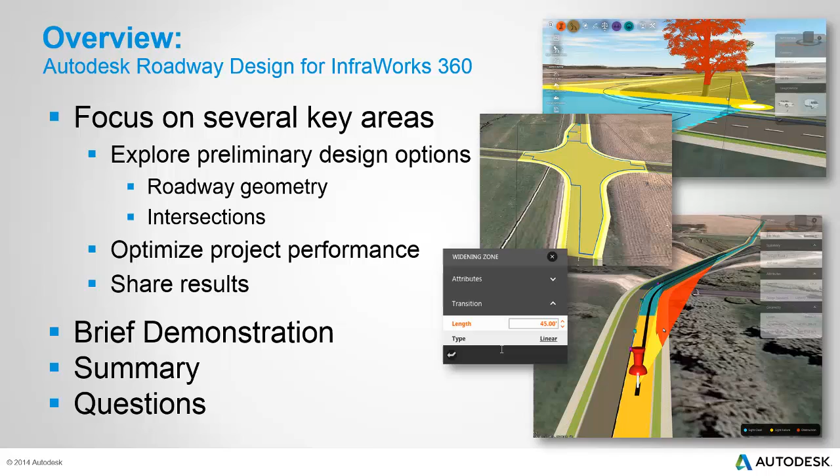Finally, we will explore how we can share our results with others. This will include internal folks like the design team and sub-consultants, as well as external folks like the project owner, recommending body, and the general public. Now, the way we will focus on these key areas will be through a brief demonstration followed by a summary. We will also leave some time at the end for Q&A.

My goals for today's session are easy. First, I want to give you some exposure to the roadway design for InfraWorks 360 solution, as well as a review of a subset of its capabilities. I say subset because it would take much longer than our meeting today to review all of its functionality. Instead, we will concentrate on the primary features and their related business benefit. In other words, how specifically does roadway design for InfraWorks 360 improve the preliminary road design process? So with that, let's go ahead and get started.

We begin our demonstration with the following scenario. Our objective is to explore some alternatives where we can connect the community on the west with the community on the east. The catalyst behind the project is to reduce overall traffic congestion. Currently, there are minimal river crossings available. As a result, during peak traffic hours, the existing bridges on the north and the south cannot accommodate the required traffic flow. In preparing these alternatives, ideally we would like to find a route where we can connect this main road here on the west side to this main road here on the east side.

Knowing this, as my initial proposal, I'm going to explore connecting from the end of this existing dead-end street along the existing roadway here and then into the open space. Now, to reach the open space, I will need to cross another main road at this point. From here, I will run my new road along the natural break in the property over to the riverbank. We will then cross the river and meet up with the existing road on the other side.

Now let's pause for a minute and think about how long would this process take you today. Essentially, coming up with a concept, determining if it's feasible, as well as creating a deliverable to explain the design intent of your proposal. And as you think about that, let me show you how we can accomplish this objective using roadway design for InfraWorks 360 Pro.

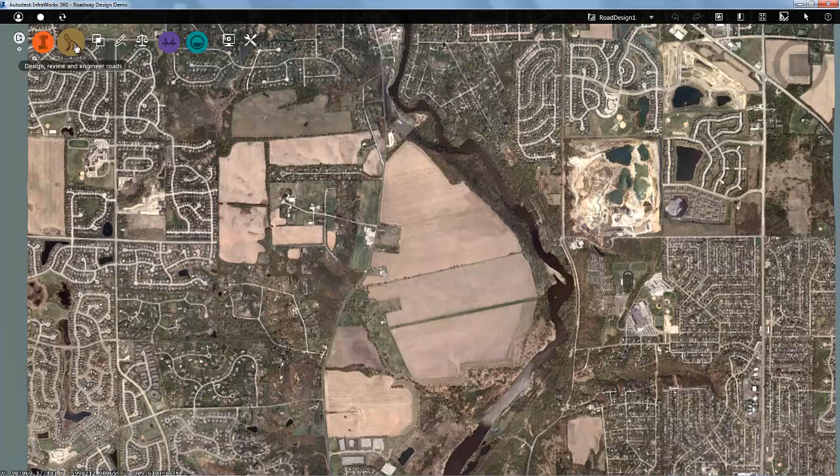Our next step will be to begin our preliminary road layout. This is a very straightforward and easy process. We simply click on the persona-based roadway tools, choose our desired road type, and select the style.

From there, we click the points to define our roadway. Notice as we do this, we have the option to enter a design speed. This design speed will determine the appropriate rules-based information during our layout. For example, notice as we change direction, a horizontal curve is automatically added. This curve is consistent with a 30-mile-an-hour design speed.

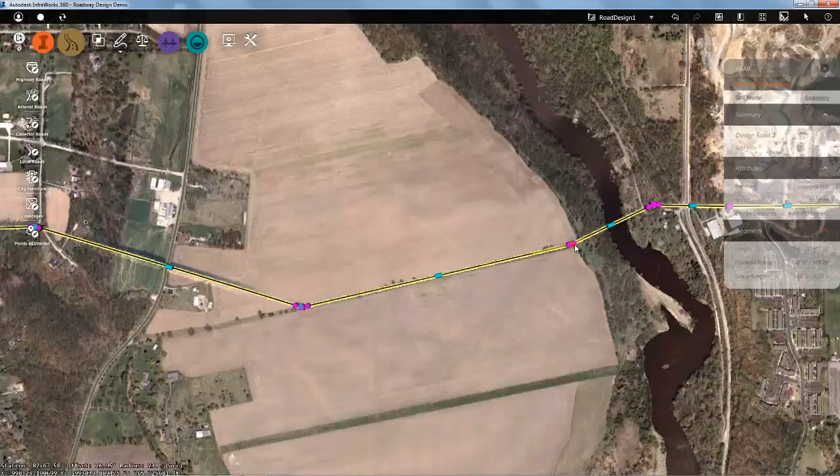We will go ahead and continue to pick points until we've crossed the river and tied back into the existing road on the east. Once finished, Roadway Design for InfraWorks 360 generates a completely modeled 3D roadway. Let's get a little closer and take a look.

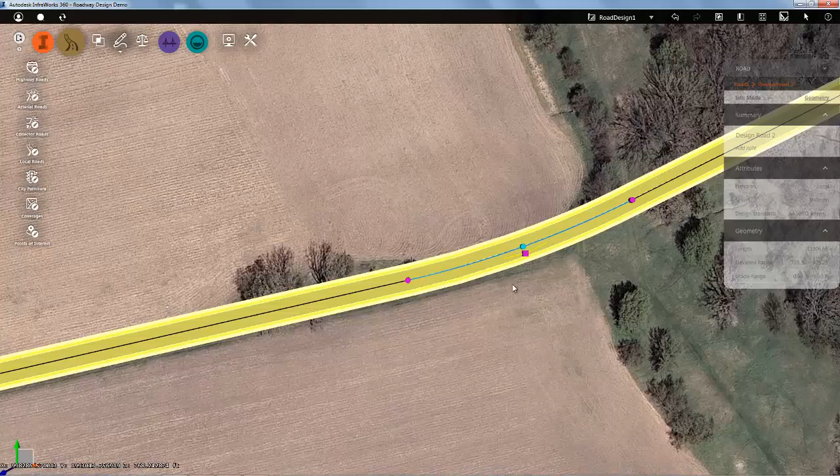As we zoom in, we can see intelligent grips have been added to key points within our geometry. Clicking on these grips allows us to dynamically update our design in real time. For example, we can update the horizontal curve radius, move the PI location, or both. After any change, the model is automatically updated, providing us immediate feedback.

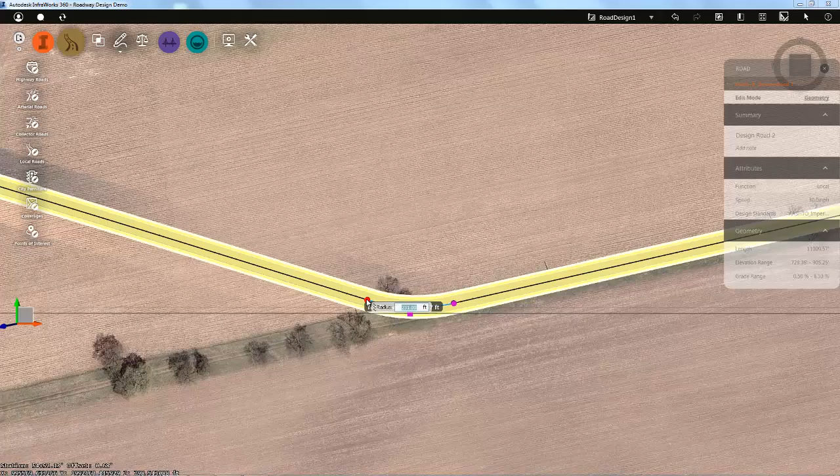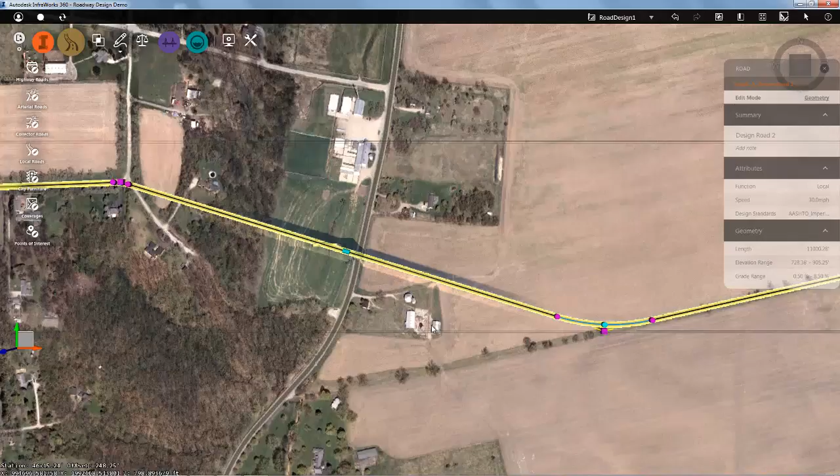Using this functionality, we can easily make adjustments to any portion of our original layout. For example, setting the size of this horizontal curve to 1,000 feet. As we move further to the west, several things become obvious. First, not only did our rules-based tools assist us with the horizontal layout, but also with the vertical.

We can see that the change in grade from one PVI to the other created an overpass situation with the existing road. This happened automatically because before we got started, I created a quick roadway to represent the existing road in this area, so we could see the intelligence that exists when two modeled roads cross. If the elevation is such that one is higher than the other, an overpass is automatically created. If their elevations are instead similar, an at-grade crossing is automatically generated.

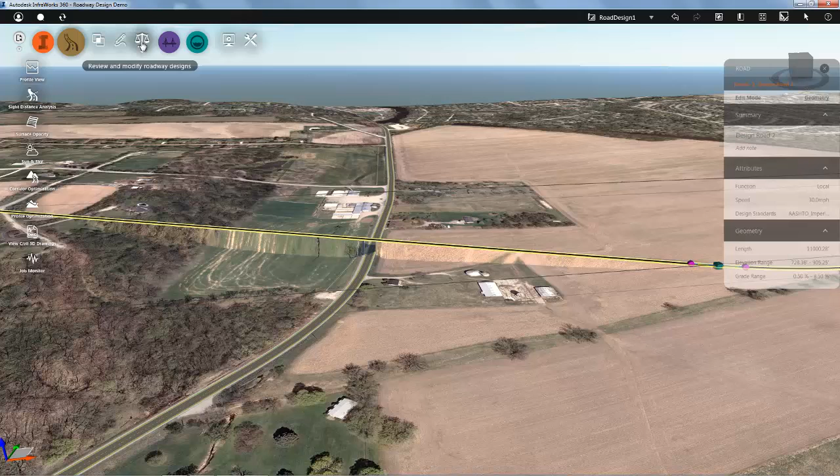Because an overpass is unnecessary in our design, let's adjust the vertical to create an at-grade crossing. We can quickly do this by displaying the profile view for our roadway and making our changes. As we review the profile, we can see the effects of the rules-based tools that were used as we picked the points for our roadway. In other words, PVIs, slopes, and vertical curves were all created consistent with a 30-mile-an-hour roadway design.

The total length of this road is just over 2 miles, and you may be wondering if Roadway Design for InfraWorks 360 can optimize the overall layout for us. The answer to that question is yes. Included in Roadway Design is a cloud-based profile optimization tool. Using this tool, in conjunction with some cloud credits, we can leverage the virtually infinite power of the cloud to determine the best solution. We can begin the optimization process by clicking on the Profile Optimization tool, and after 30 minutes or so, a solution is delivered directly back to our model.

For the sake of time, we will not perform the automatic optimization today, but I will show you an example of the automatically generated report that would be returned with the completed roadway geometry. The first page of the report contains a graph showing the optimized solution as well as some construction cost information. This information was determined using user-definable earthwork and construction unit pricing.

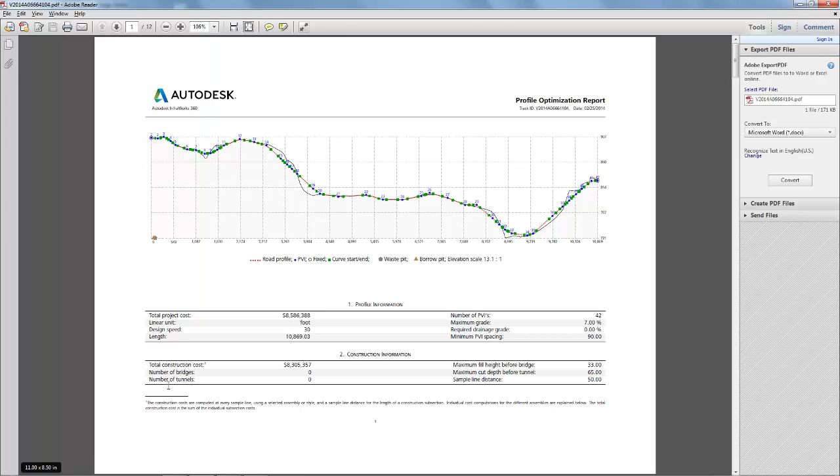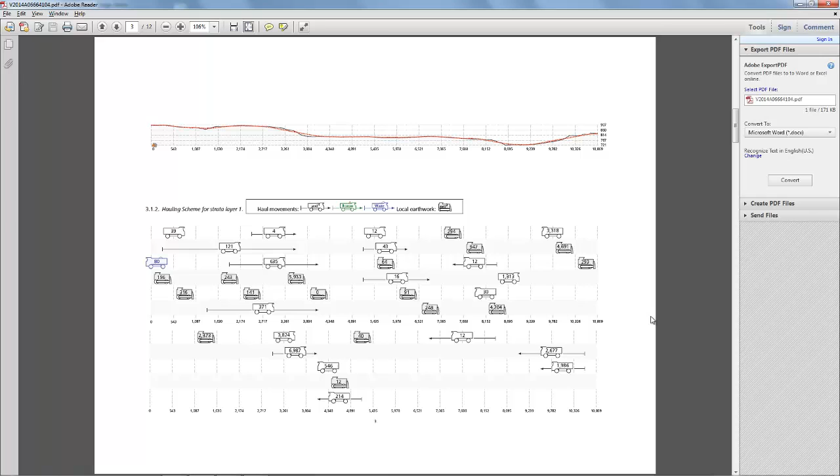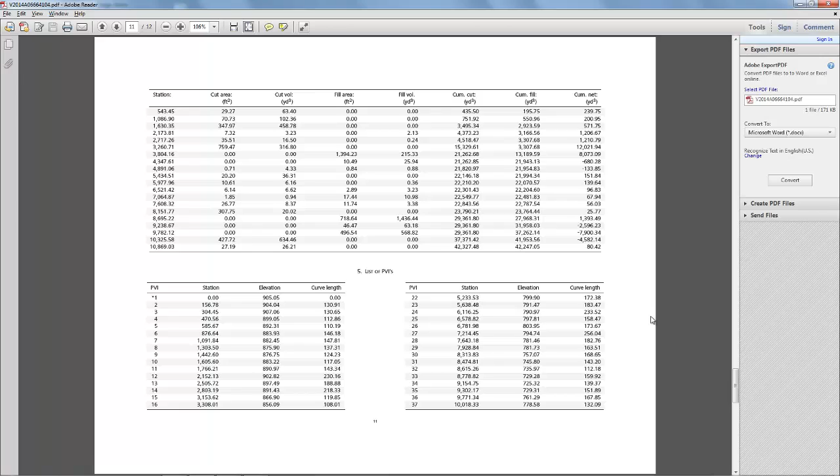The next several sheets show detailed road assembly and earthwork information to support the overall cost estimate. The report even contains a chart showing the proposed hauling scheme. The report concludes with cut and fill information at key points in the design, as well as a listing of every PVI station, elevation, and curve length. In short, by leveraging the cloud, we can have an optimized roadway design complete with supporting documentation.

Once again, for our concept, we will continue to make our own adjustments. We'll start by adding a new PVI at the location of the existing roadway. Notice as we make the change, we see the model view update in real time. Our overpass has now automatically changed into an at-grade crossing, and we can continue to refine the profile such that it drains away from the intersection.

We will accomplish this by adding another PVI and setting the station and elevation to meet our needs. Once again, we can see our changes update automatically and in context with the existing surroundings. As I make my final decision on placement, such that I maintain a 1.75% slope from the existing roadway, I'd like to take a closer look at the vertical curve that has been automatically applied.

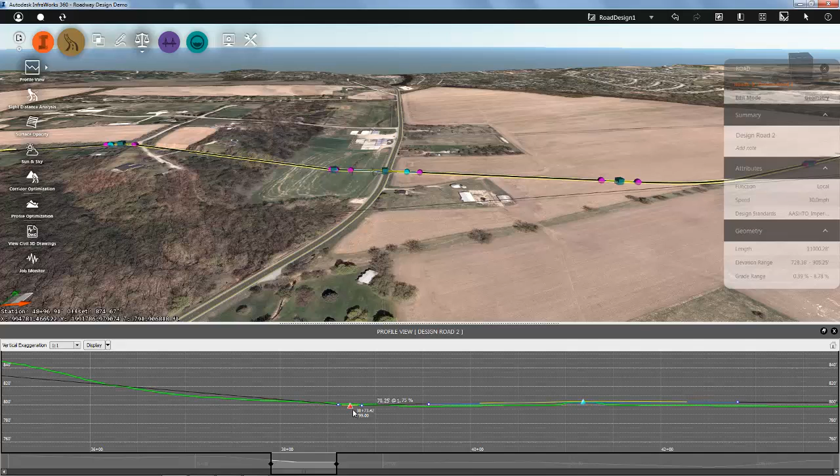Just like what we did using the horizontal grips, we can update the vertical geometry exactly the same way. In other words, not only can I adjust the station and elevation of the PVI, I can also easily change the size of the vertical curve to meet my needs.

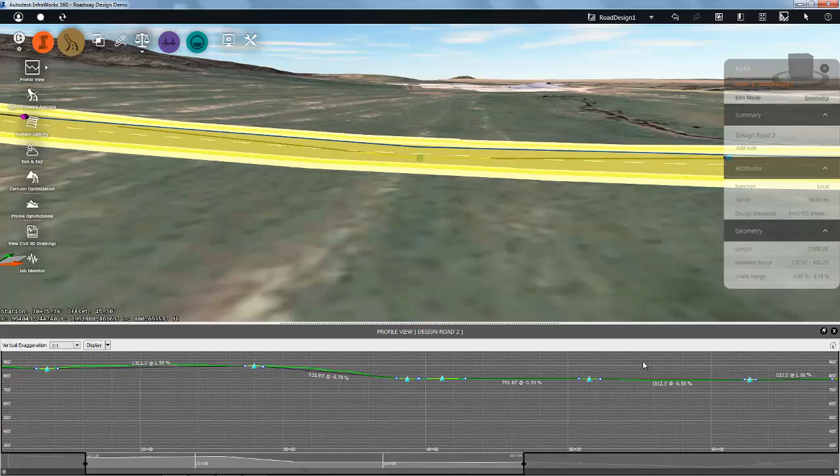Next, let's shift gears and look at the impact of both the horizontal and vertical design when it comes to road grading. We will begin by positioning ourselves in space such that I can see how our proposed road matches back into the existing ground.

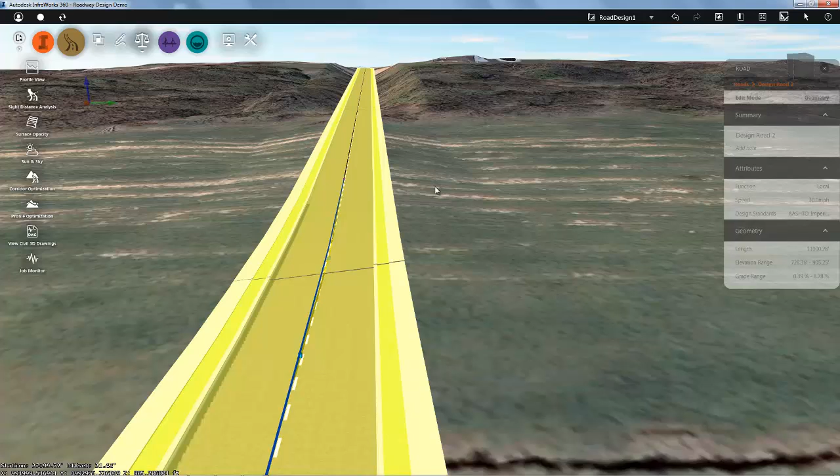We can see we have some fill here closest to us and a fair amount of cut as we move up the hill. If we would like to alter the grading, we need only make a quick change on the road's asset card. Initially, our grading is set to a fixed width of 33 feet.

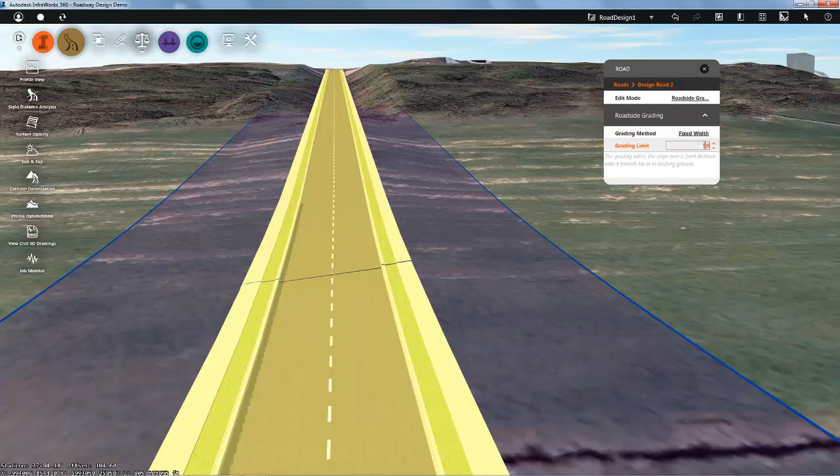But by updating this value to 50, we can immediately see the impact of the change. If we are concerned that matching in at 50 feet may disturb too much of the existing area, we can set a fixed cut and fill slope to match back in sooner if possible.

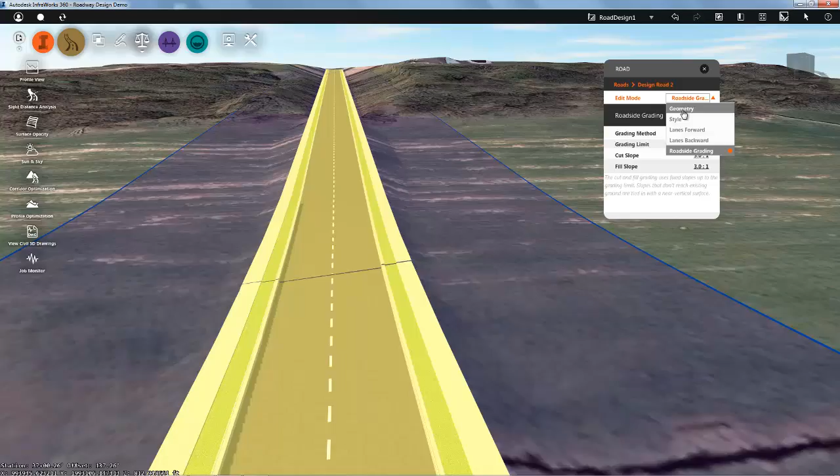With a strategy in place to adjust our horizontal and vertical design, as well as our road grading, let's perform a quick sight distance analysis to see if our preliminary design has any areas that are prone to safety concerns. This is very easy to do.

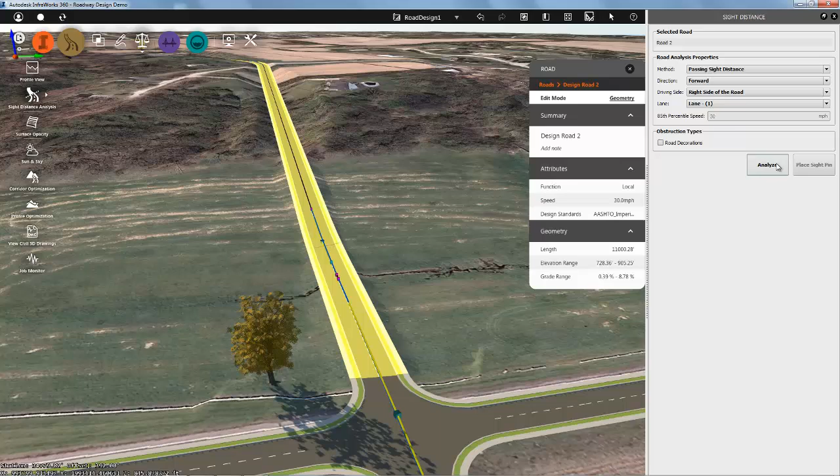After clicking the Analysis tool, we can choose between a stopping sight distance or passing sight distance analysis and confirm our direction of travel. Note, you also see an option to choose lane. Now our road design has only one lane in each direction, but if it had multiple lanes, Roadway Design for InfraWorks 360 is capable of performing the analysis on each individual lane.

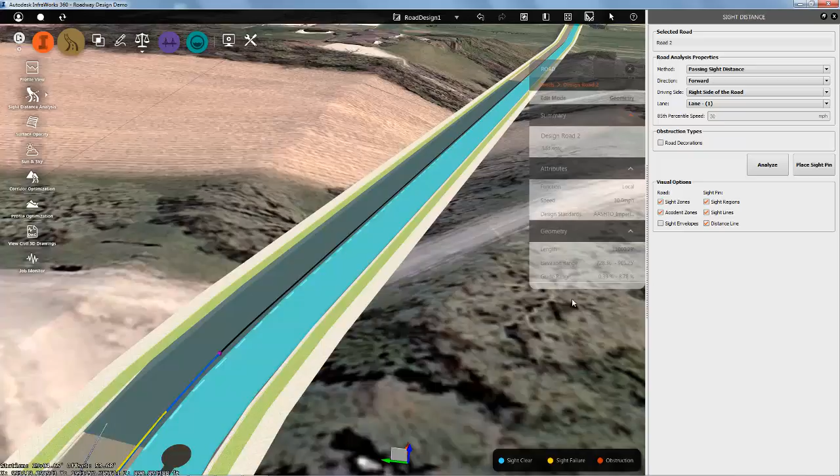With our analysis completed, let's take a look at our results. We'll start up here at the top of the hill and then position ourselves looking back towards the intersection. As we do this, we can see the forward lane of our roadway has been colored to represent different sight conditions. The light blue areas indicate no issues.

The yellow areas represent some form of sight failure. The dark areas represent a potential accident zone. And any red areas represent a complete sight obstruction.

If we would like to drill down deeper into the analysis, we can place sight pins to see exactly the extents of the obstruction. Using these sight pins, in conjunction with displaying the sight envelope, shows us areas of our model that will require some additional attention.

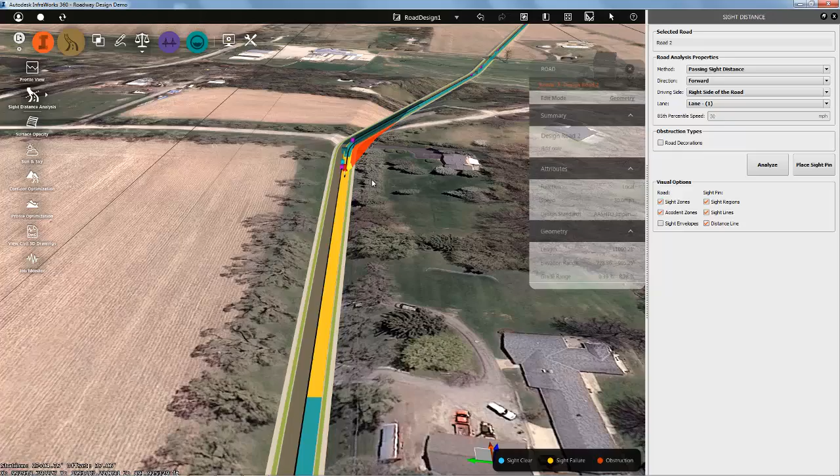For example, in this area, to eliminate the issue, we could change the road elevation, alter the grading, increase the radius, and more. Because we are working with a dynamic model, we have the power to experiment with multiple what-if scenarios to achieve the best possible solution.

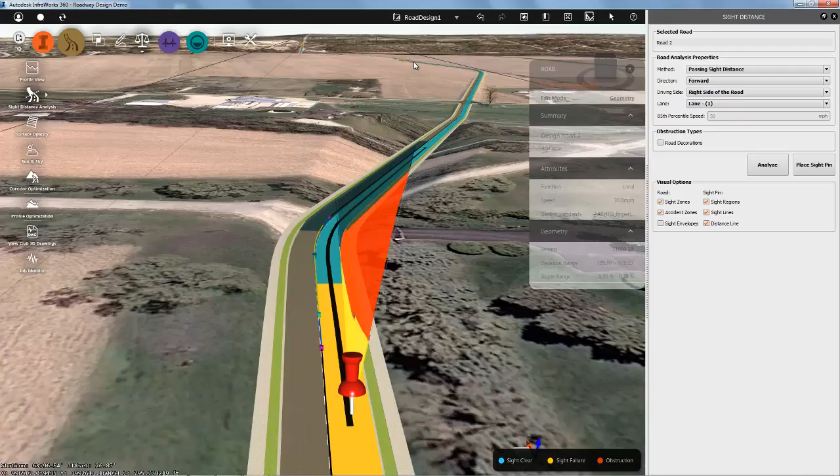Let's move further down the road and check out another example. In this instance, the road is straight, but there still seems to be a passing sight issue. After closer inspection, we can see that the likely cause of the problem is a grade change at the PVI.

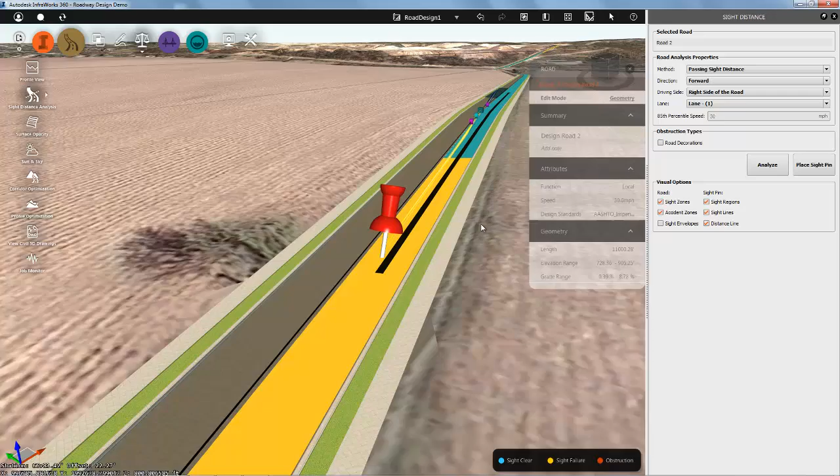To resolve the issue, let's alter the length of the vertical curve and see if it makes a difference. By selecting the appropriate grip, I'll set the curve length to 1,000 feet.

I'll then perform another analysis and verify the results. When finished, we can see that the forward lane is now clear and free from any passing sight distance issues.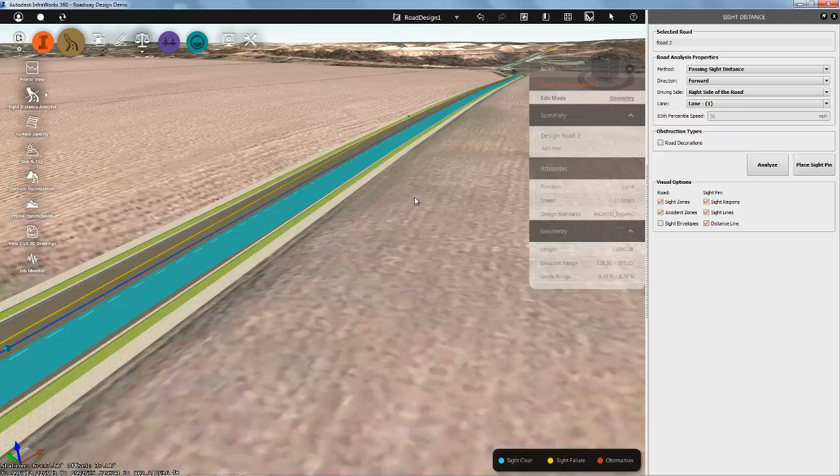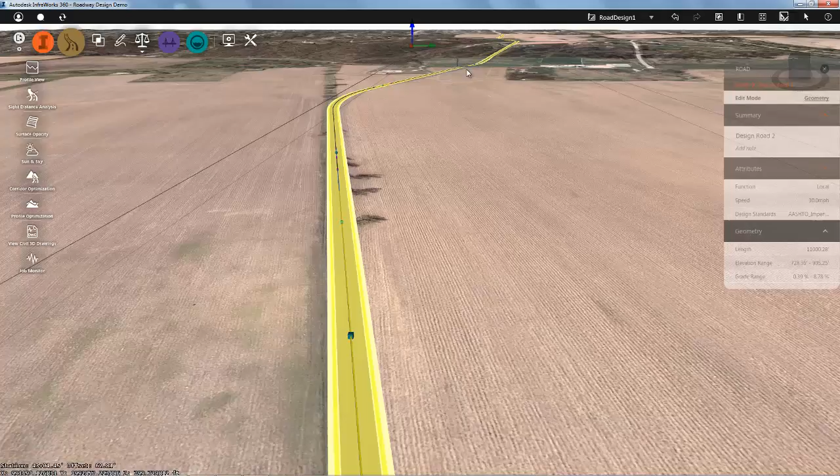Now please note, when it comes to sight analysis, we are not limited to just the roadways. We can also perform sight analysis on intersections as well. Let's reposition ourselves to view the intersection created where our proposed roadway crosses over the existing road.

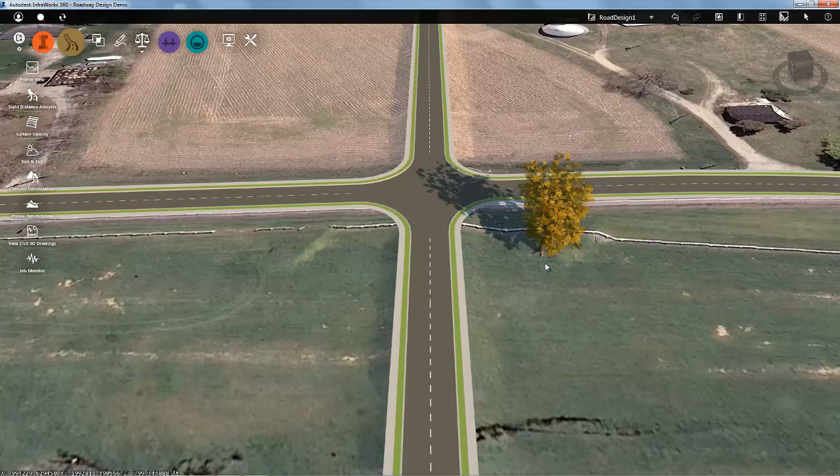As we maneuver into position, we see a tree at the southeast corner of the intersection. Now before we started, in addition to me creating the existing roadway, I also added this tree, and you'll see why in a few minutes. But first, let's take a look at the intersection geometry.

By clicking on the intersection, an asset card is displayed with a rules-based tool to control the intersection radius. In other words, the default radius has been set up to accommodate passenger cars. But what if my roadway design will require truck traffic? How would I accurately represent that in my model? Well, using this tool, it's very easy. We simply select the appropriate vehicle type and the geometry updates automatically.

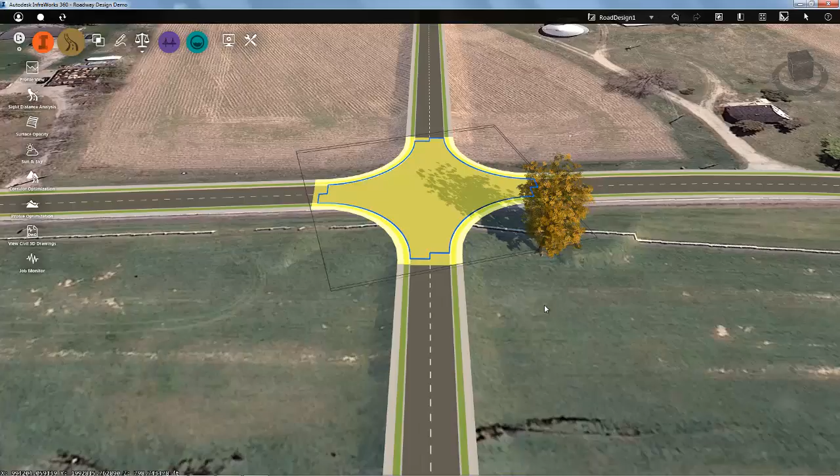Next, let's take our intersection geometry layout one step further. The primary road through the intersection will likely remain the existing north-south road. To facilitate a better flow of traffic, let's explore adding some turn lanes. To do this, we simply click on the desired lane and then drag to create our widening.

For our first pass, we will see how a 40-foot distance looks. Remember, we can start with rough numbers and then use the asset card later to make them more exact once we make our final decision.

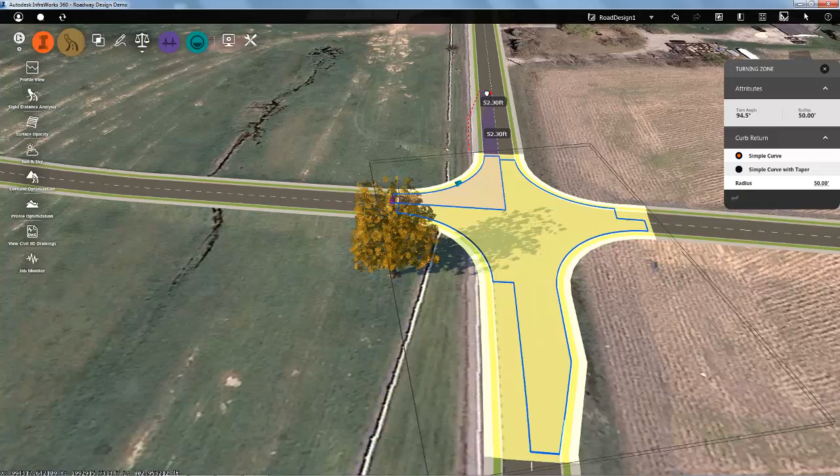I like the way my intersection looks, but I'm going to update my values to 45 feet for both the south and north side of my intersection.

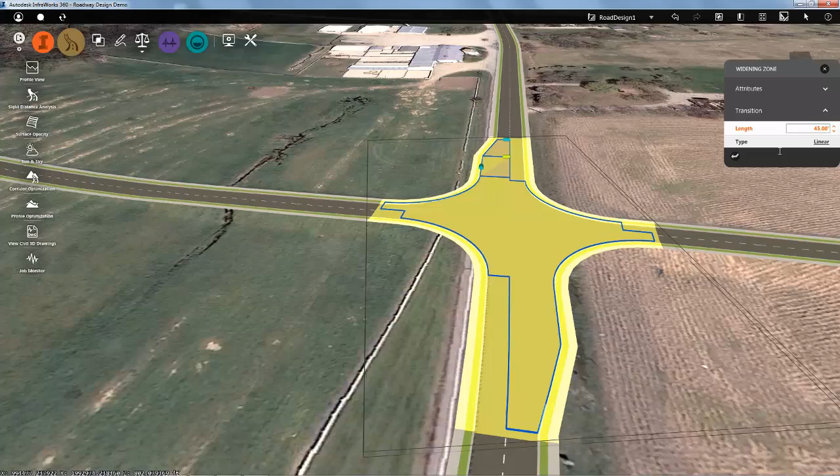With our intersection layout complete, let's perform some sight distance analysis. We'll begin by positioning ourselves so we're looking down on the intersection, and then choosing the analysis tool.

When working with intersections, I can choose my direction of travel, as well as which road I'm interested in checking. Notice as I hover over a road, I get immediate visual feedback. Once I choose an approach, I can analyze my intersection using stop or yield control.

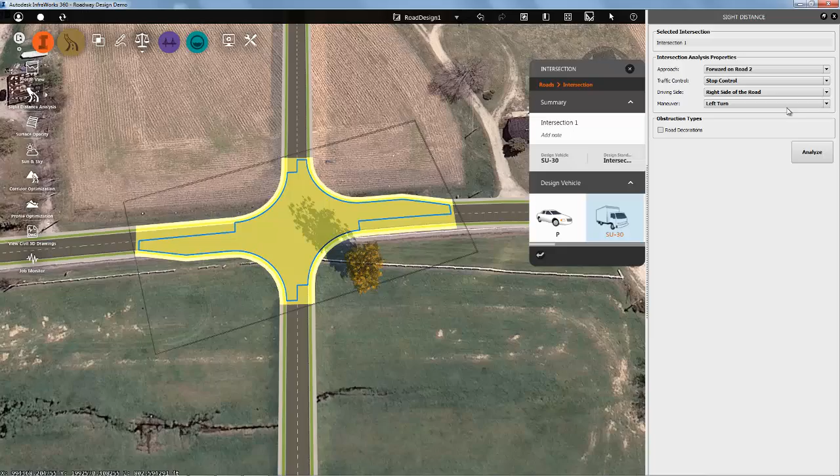I can then choose my maneuver. In this case, I'll perform my analysis for a left-hand turn. The results show sight envelopes indicating the area that must be clear.

Because we're working with an aerial photo, we can compare these areas against what we see in the imagery. In our case, everything looks good.

Let's switch our analysis to the opposite direction. Using a stop control with a left-hand turn, our sight distance lines are also in good shape.

Because this is a more rural area, let's see what the impact would be by switching to yield control. Our sight envelopes are now much larger, but compared to the aerial photo, we should still be okay.

However, performing the analysis on the other side produces a very different result. Using yield control, we can see that the tree does pose a safety issue.

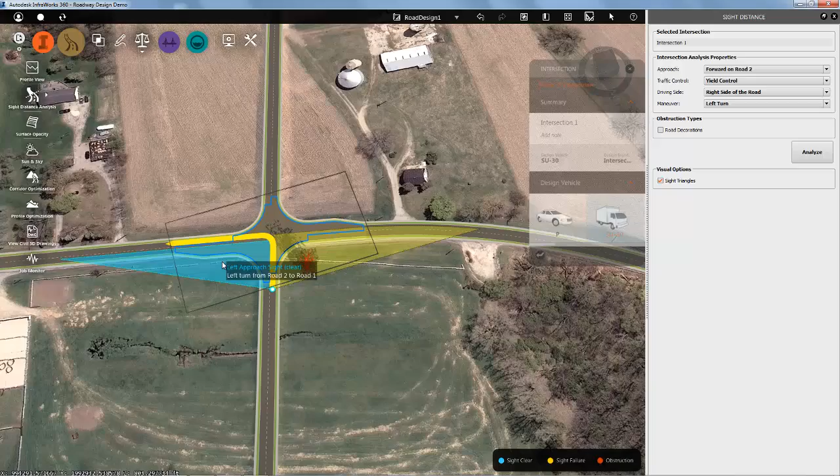That's exactly why I added it to the model, to show that if modeled, Roadway Design for InfraWorks 360 will factor all of your modeled geometry into the analysis.

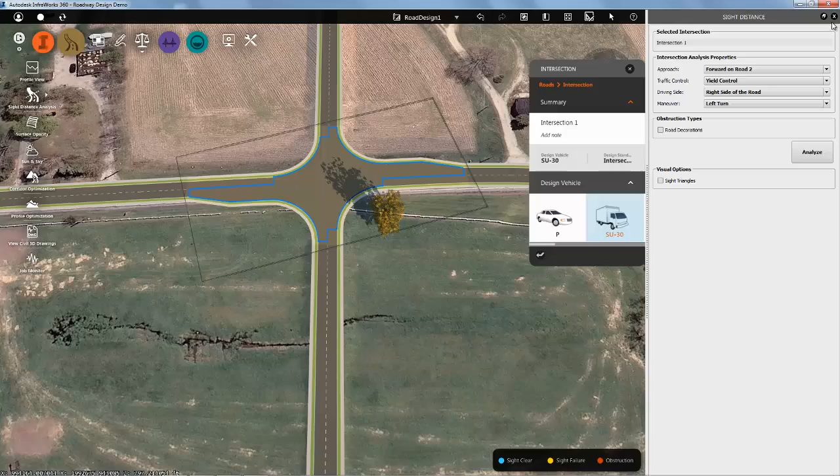Now that we have a strategy for dealing with safety issues related to sight distance analysis, let's continue working our way further east. As we do, keep in mind that we can continue making edits and have our model respond accordingly. For example, I can still edit the horizontal geometry of my roadway and not lose any of the values I used laying out my intersection.

As an example, I'll adjust the location of this PI, and my road geometry, as well as my intersection, will automatically update.

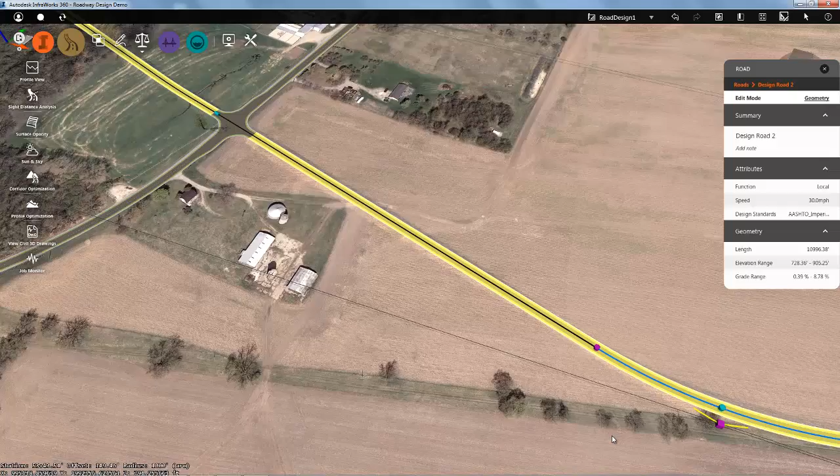Alright, let's continue on to the east and quickly model our bridge crossing. Now when it comes to the bridge, we will model it as 4 lanes rather than only 2.

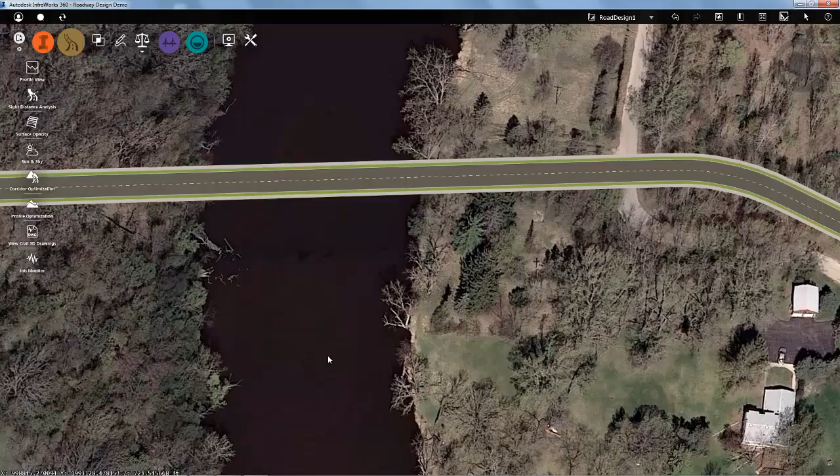In the future, this will provide us some cost savings in that when our proposed road reaches capacity, we can widen the road without also having to invest in a bridge widening project.

Widening the bridge is easy. We simply click on the roadway, use the asset card to specify which lane will be widened, and then create a new zone. From there, we click where it should start, and then where it should end.

Using the existing surroundings as my guide, my bridge will be approximately 450 feet and run from station 8500 to 8950.

Keep in mind that these grips are also dynamic and can be changed at any time. With our zone established, we go back to the asset card, assign the number of lanes, and our model is automatically updated.

Because our bridge will be symmetrical, we complete our bridge widening by switching to the opposite lane and creating a zone using the same parameters as the first.

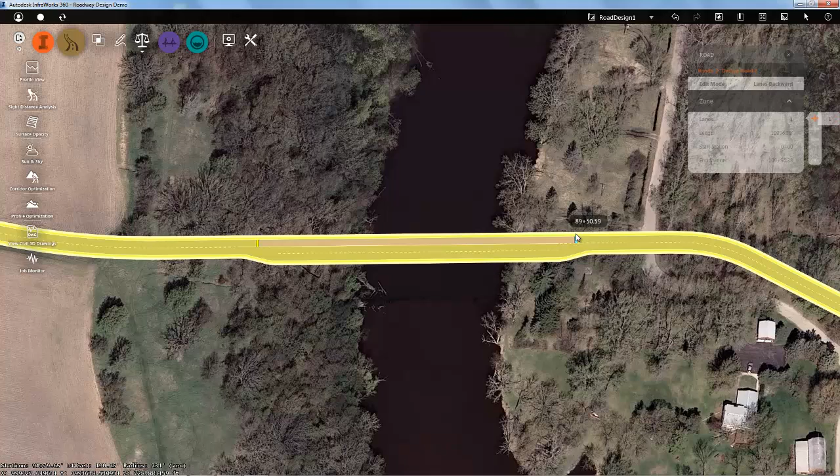When complete, we have a widening, but it doesn't really look like a bridge yet. In other words, our entire road is currently defined using the initial road style from when we originally laid it out. To make this area look more like a bridge, we will define a new style zone and apply the bridge style.

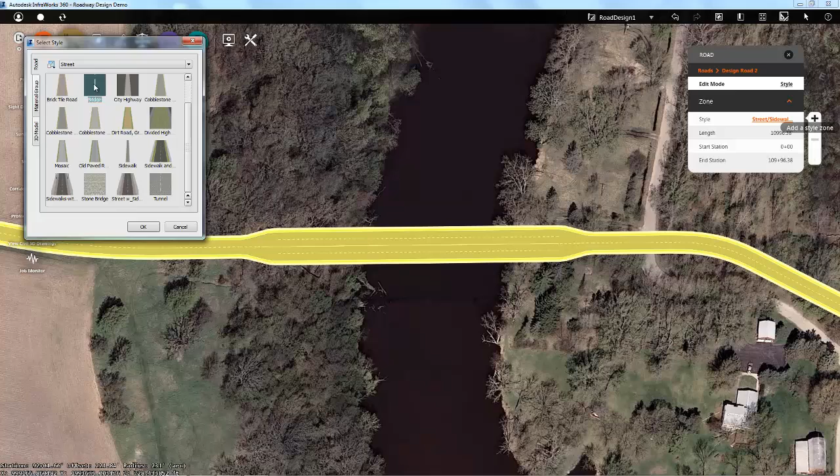Notice the process used to determine the start and end of the zone is the same as what we did earlier. When working with Roadway Design for InfraWorks 360, you'll find a very consistent look and feel to the user interface.

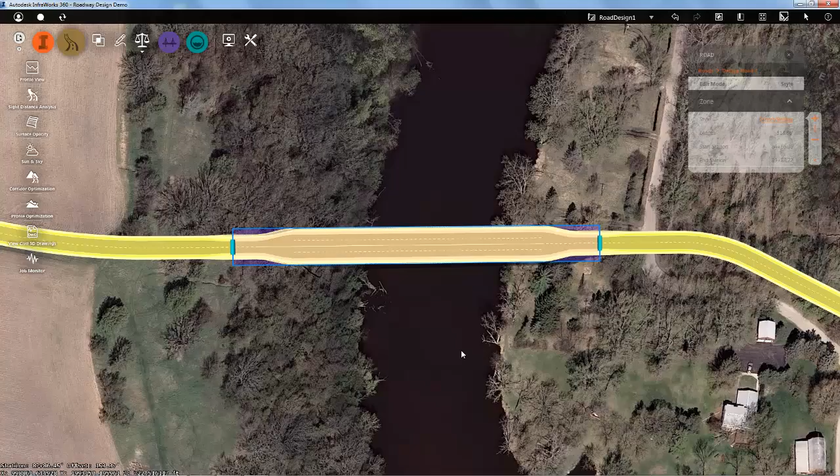With our style applied, we'll position ourselves in space to get a better look at our bridge. We can quickly see that bridge piers have automatically been placed in the area where we cross the river.

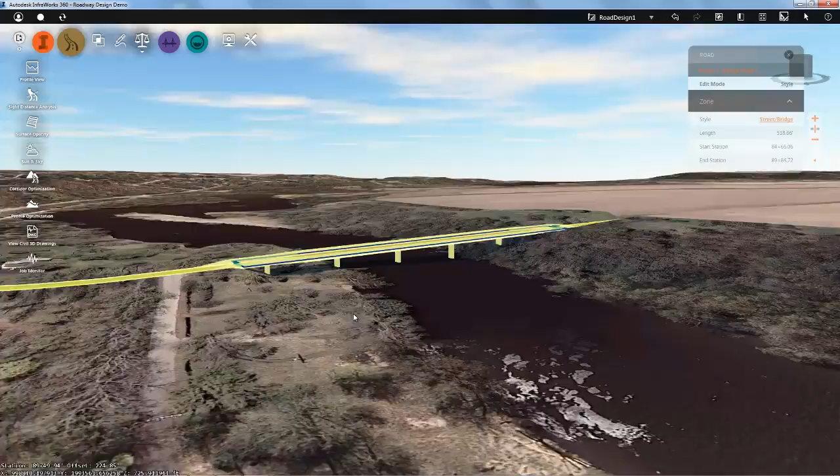With our bridge complete, we have accomplished a lot when it comes to our preliminary design. At this point, let's create a quick animation so we can truly experience our project as it's currently defined. Normally, creating an animation isn't quick—we think about renderings that run all night, needing special hardware, software, or a visualization specialist. Fortunately, Roadway Design for InfraWorks 360 is different. We can create a complete animation in real time with only a couple of clicks.

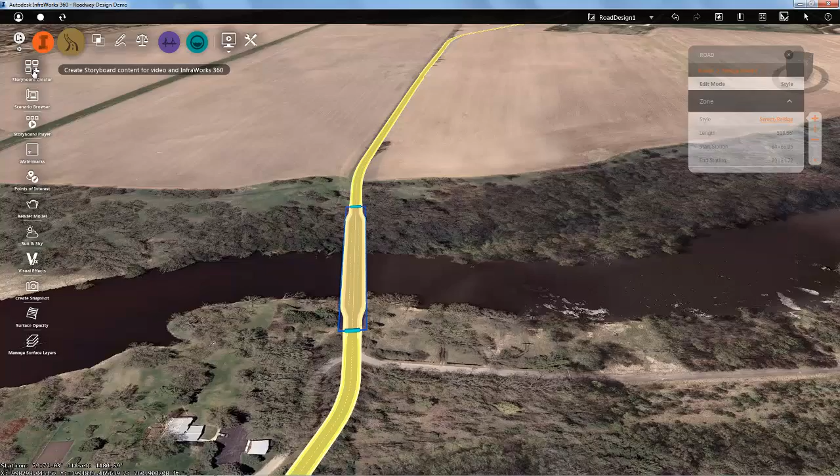We begin by creating a storyboard and then using our proposed roadway as the camera path. That's it. After a short amount of processing, we can immediately view our animation. Because our road is 2 miles long, I'm going to accelerate the playback so we can quickly see from one end to the other. And when we click play, our animation begins.

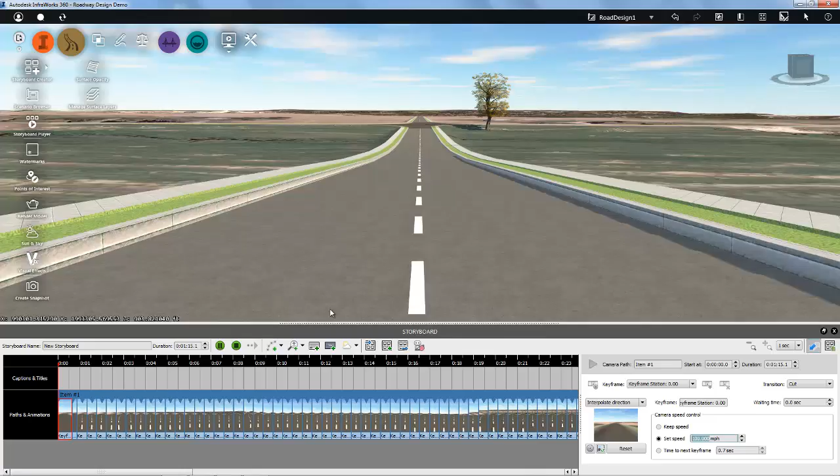As we experience our proposed roadway, I'd like you to think about a couple of things. First, what do you typically use to convey the design intent of your projects to, say, a recommending body? Do you mount construction drawings to foam core boards before heading out to the meeting? Maybe you don't use construction drawings at all, but instead create marker renderings or color exhibits. How long do those take to create, and how easy are they to update? And in either case, does everyone immediately understand what you are proposing?

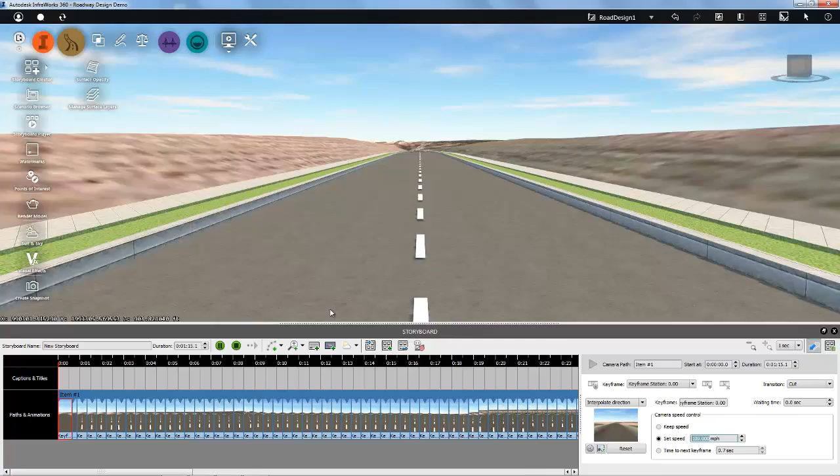In a project like this, I'm sure you can imagine that multiple property owners will be impacted. Additional right-of-way will be required, and lots of folks are going to have questions as to why this route, and will it actually work. Using Roadway Design for InfraWorks 360 to create an animation like this provides us the tools to address any of these questions.

Additionally, animations like these can be exported such that they can be used on a website. Imagine how beneficial it would be for the public to experience the multiple alternatives prior to the public hearing. Finally, Roadway Design's dynamic updates in real time also give you the option to leverage your model right there at the meeting when responding to questions.

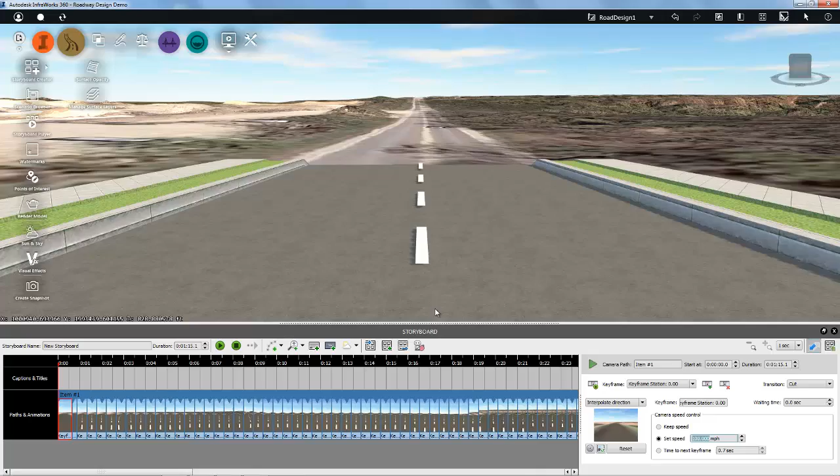At this point, I am pretty pleased with where my roadway project stands and would next like to get a rough estimate as to the earthwork required for the improvements. Remember, there was a fair amount of cut on the west side, and I am interested to see if I am anywhere close to balancing. After making this determination, if necessary, I can further refine my roadway concept.

To determine this value, I will have the system calculate some rough terrain statistics. Essentially, this tool was designed to calculate the changes to the existing terrain as a result of my improvements. To perform this calculation is simple—I need only pick points to define the limits of the area I'm interested in computing.

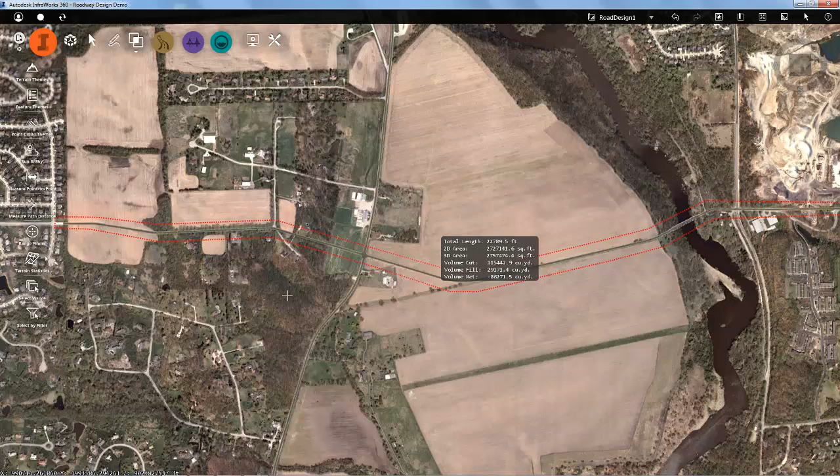When finished, the results are displayed, and I can see that I have substantially more cut than I do fill. To help offset this, I can go back and further refine my preliminary design to help address the difference.

When I am completely satisfied with this conceptual layout, I can restore my project to its original state and then create a second proposal to explore a different route. I'm sure you can imagine that there are numerous possible routes that can be considered. I can also easily return to this proposal at any time to make any further refinements.

Well, now we have our answer. In roughly 15 minutes, we were able to explore a proposed solution for this project, and it is far more detailed than a line drawing on an aerial photo. Instead, it is a dynamic 3D model we can use to estimate the project's feasibility.

We can perform various forms of analysis to uncover potential safety issues, as well as produce an animation that we can leverage to quickly convey our design intent to any of the stakeholders. And if our concept is approved, we're ready to take our preliminary layout to Civil 3D, where we can perform more detailed design.

To summarize, what is Autodesk Roadway Design for InfraWorks 360? Essentially, it is a software solution that helps transportation professionals more effectively explore preliminary roadway design options in context, optimize project performance, and share the results.

During our demonstration, we used it to streamline the layout of our roadway geometry. Once created, we could leverage intuitive grips or other tools to update the geometry and see the results in real time. We saw that leveraging the infinite power of the cloud to optimize our roadway profile was also an option. And throughout the entire process, we were able to perform various forms of analysis, even on our intersections, to assist us in computing volumes as well as uncover potential safety issues.

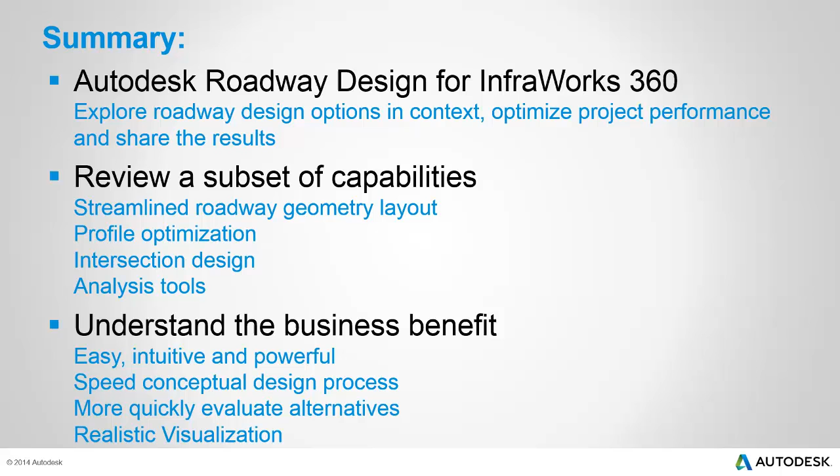As for the business benefit, Roadway Design for InfraWorks 360 is easy to use, very intuitive, and extremely powerful. Its numerous features will enable you to speed the preliminary road design process, as well as more quickly evaluate numerous design alternatives, such that you can present your client the best solution possible.